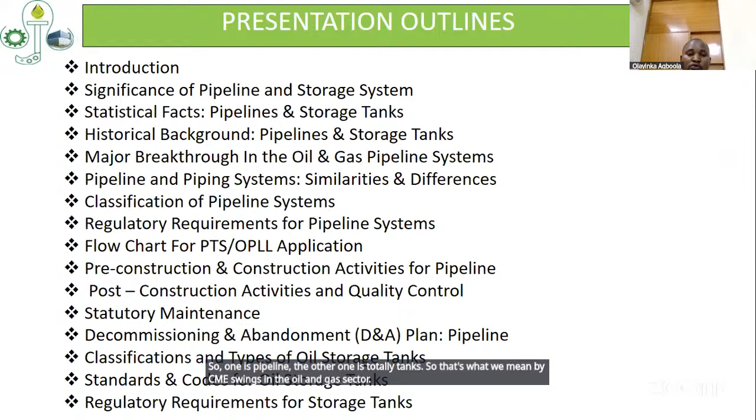And if you go back, as you can see from this picture, we can see these twins joined together by their shoulders. One is pipeline, the other is storage tanks. That's what we mean by Siamese twins in the oil and gas sector, because whenever you talk about pipeline, we also talk about storage.

Now the importance of pipeline and storage cannot be overemphasized because it cuts across the upstream sector, which has to do with exploration, development, and production, and also the midstream sector, down to the downstream sector. In all three sectors of oil and gas, upstream, midstream, and downstream, you must talk about pipeline and storage. That is why the importance of pipeline and storage systems cannot be overemphasized.

As important as these two things are, we must try as much as possible to design them with the relevant standards so as to function safely and effectively. Those are the two keywords. Whenever pipeline and storage systems are designed, they must function effectively, doing the work they are meant for, and work safely so that there will not be any form of explosion, leakages, and the likes.

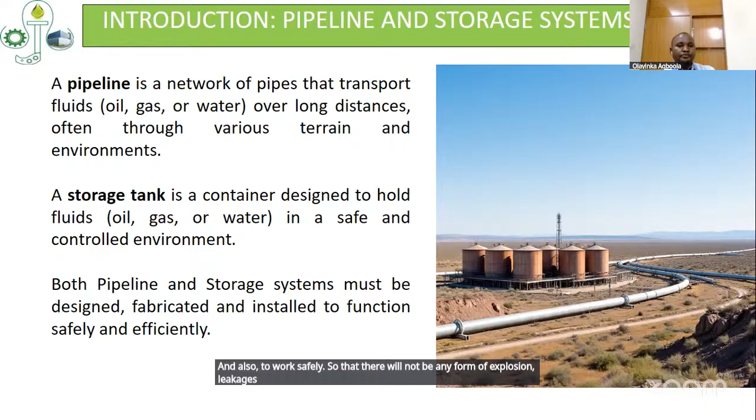Still talking about the significance of pipelines and storage tanks, let's look at a pipeline like the circulatory system of the human body. Those of us that did biology in secondary school know something about the circulatory system, and we want to relate it to the oil and gas sector. One thing I appreciate most in engineering and science is that everything scientists are trying to invent is like a creative ability that God has deposited in us. Everything we invent mimics the creative nature of our maker, which is God.

So now, in the oil and gas sector, let's look at this circulatory system. I said pipeline and storage tanks can be likened to our own circulatory system. For pipeline and storage, you need a pump, either to pump into the tank or to pump away, either for discharge or to receive. The same way our heart is pumping blood, which in oil and gas can be oil or water, so is the pump working. So pump is analogous to human heart.

Then the pipeline is also equivalent to arteries and veins, which we call blood vessels, that take bloodstream from one region or organ to the other. Then the storage tanks in this sense are also equivalent to various organs. You pump blood to make the blood complete the circulatory system that we have in the human system.

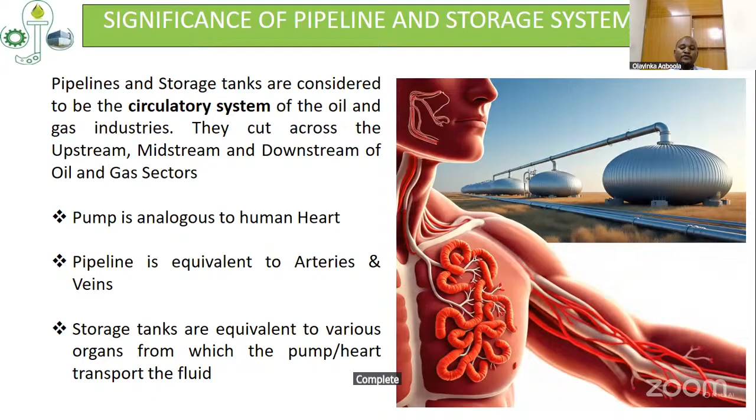Okay, so we are looking at the statistical facts about pipeline and storage. According to NUPRC, the Nigeria Upstream Petroleum Regulatory Commission, obtained from their website, there are 323 developed fields in Nigeria, that is in upstream. And then these fields are connected to 265 processing facilities. And then the stabilized oil and gas are exported via 31 export terminals.

So export terminals have to be connected maybe to a pipeline, or some people use barges to do the operation. Then the onshore processing infrastructure are linked to 8 crude oil or condensate NGL export terminals. So altogether, the total in Nigeria is about 5,284 kilometers of pipeline. Also, as at Q1 2023, what we have is about 3,200 kilometers of gas pipeline in Nigeria. And then the current one everybody should be aware of is the 40-inch by 614 kilometer AKK pipeline, which is the Ajaokuta Kaduna Kano pipeline.

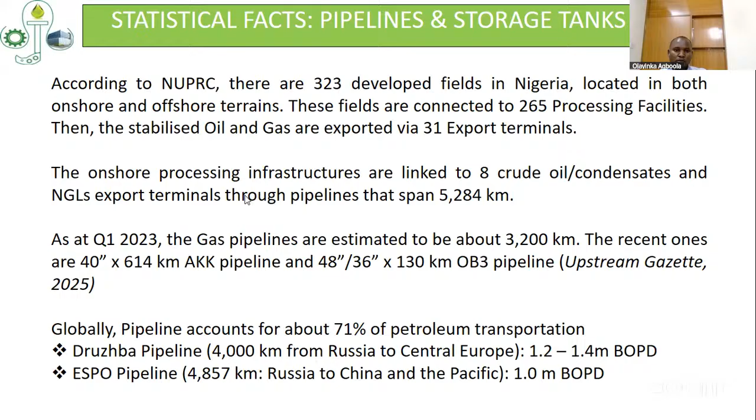Okay, so quickly, this third one, Nord Stream 1 and 2, is also from Russia, and the length is 1,224 kilometers. But this one, because of the ongoing issue, Nord Stream 1 and 2 is not operational at the moment. Then the Keystone pipeline system, which is about 3,380 kilometers, carries oil, 590,000 barrels of oil per day, from Canada to the US.

Now, as we have seen pipelines across the globe, in all this, the US has the highest span of pipeline than any other country. For gas alone, they have 1.9 million kilometers, and for oil, to receive petroleum products, is ranging around 240,711 kilometers.

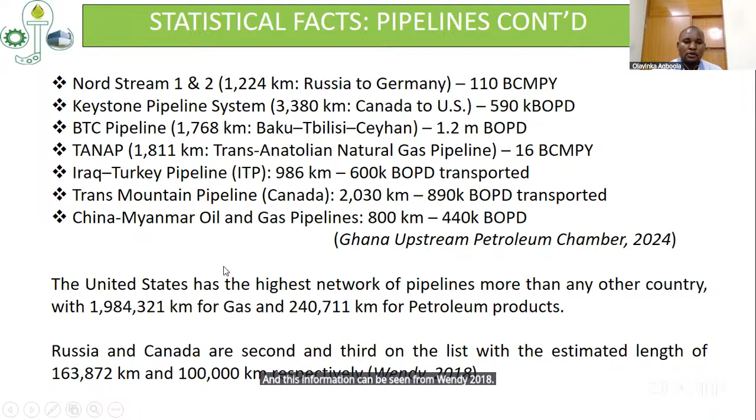Okay, so I move on. We are trying to lay this foundation so that we can understand the importance of pipeline and storage before we go into details.

Then a major breakthrough in oil and gas, the notable ones from the historical background: we have the Trans-Arabian pipeline, which we call Tapline. The length is a 1,930 kilometer pipeline, which was completed in 1950. So that is when the pipeline issue started coming up. Then they moved.

With the emergence of technology, the Alaska pipeline was also completed in 1977, to transport oil from Alaska's North Slope to Valdez, Alaska. These days, we see different kinds of pipelines cutting across different parts of the world. There's even one the Nigerian government is planning that will go all the way from Nigeria down to Morocco. That shows the importance of transporting petroleum products through pipelines.

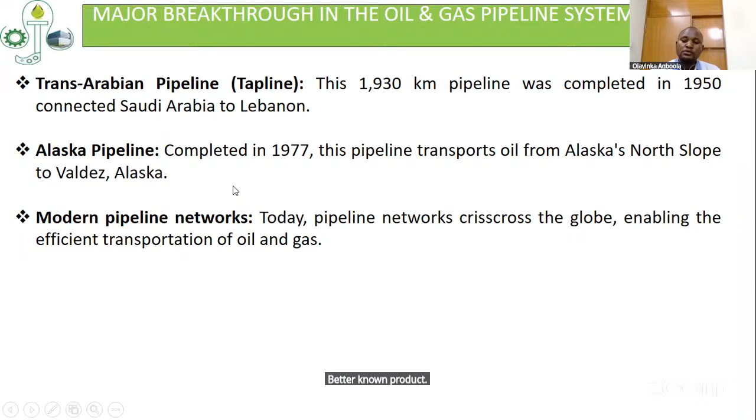Now, to some of our listeners who may not be in this field, or our young graduates, this might be confusing, because I also had that issue when I was an undergraduate. I didn't really know the difference between a piping system and a pipeline system. Once I saw a network of pipes, what came to mind was either piping or pipeline. I didn't really know the difference until later. So to cater for this set of people, we are trying to give the similarities as well as the differences between piping and pipeline systems.

So whether it's a piping or pipeline system, one thing is common among them: they make use of pipes, which we call line pipes. Line pipes are joined together, so whether it is piping or pipeline system, pipe must be there. Then there will be presence of valves and fittings, and either way, they are used to transport fluid.

But the difference is the length of transportation. If it's within a short span, maybe within the battery limits, that is piping. As we can see from this second picture, here we have pipes connected together — this is a piping system, while the upper one is a pipeline system.

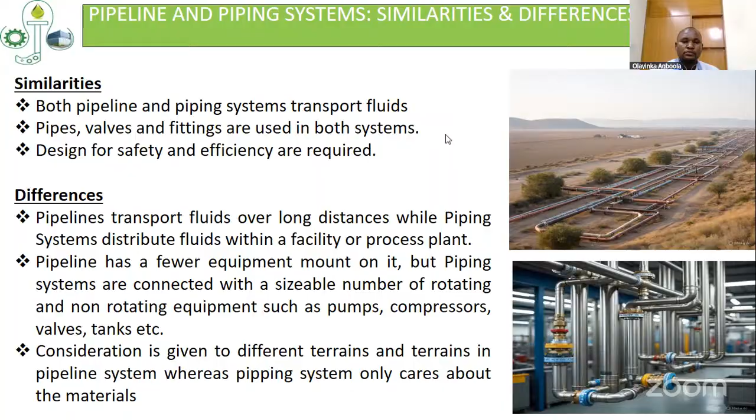Okay, so we move on to classification of pipelines. How do we classify pipelines? We use different criteria to classify pipeline. Based on location, we have onshore pipeline and offshore pipeline. Onshore pipeline is located on land, while offshore is underwater in the sea, just outside the land — it's called an offshore line.

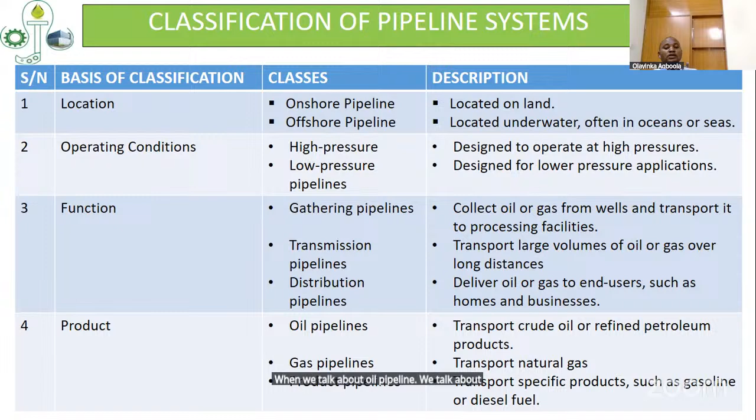If our classification is based on operating condition, then we look at high pressure pipeline and low pressure pipeline. If we look at the function we are using it for, we can classify them into gathering pipelines, transmission pipelines, and distribution pipelines. Lastly, if the classification is based on products, then we talk about oil pipeline and gas pipeline as product pipelines.

Okay, so now we have talked about pipelines. Pipeline is not something simple, because oil and gas is one of the most highly regulated industries all over the world, even in Nigeria. So a company cannot just wake up, or an individual cannot just wake up and say, I want to lay a pipeline from point A to point B, or lay an export pipeline from one location to the export terminal. No, it is not done that way.

The pipeline is regulated — speaking about Nigeria now, if it is an upstream pipeline, it will come under NUPRC, the Nigeria Upstream Petroleum Regulatory Commission. If it is a downstream pipeline, that will come under the Nigeria Midstream and Downstream Regulatory Authority. Another agency I omitted by mistake is the Federal Ministry of Environment — they are also involved, because anything you do that impacts the environment, the Ministry of Environment has to be carried along. So before a pipeline is laid, there are regulatory requirements that must be met.

So I classified that into two: approval of permit relating to pipeline routes, and approval relating to construction — those are the things you need regarding the pipeline route and the construction.

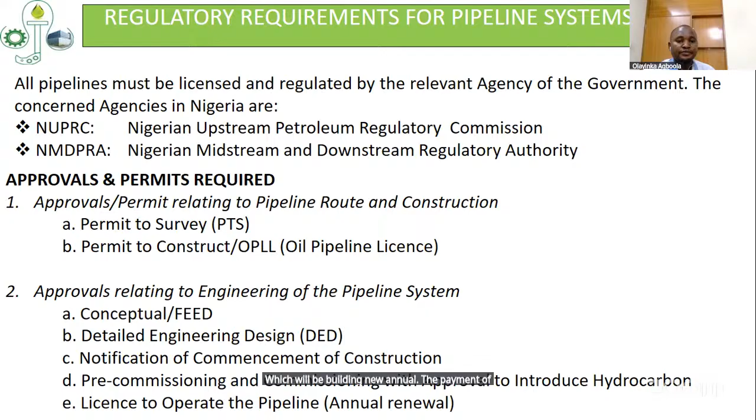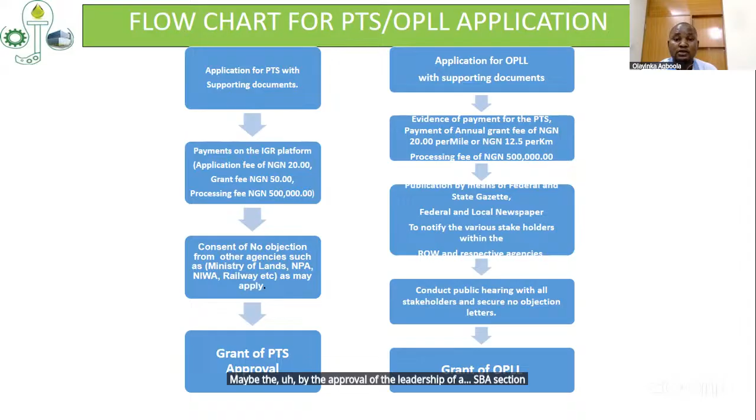This flow chart shows the process for getting the permit to survey. The left one shows the flow chart for the PTS, while the one on the right shows the flow chart for obtaining oil pipeline license. Because of our time, I may not be able to go into details, but with the approval of the leadership of SPE Abuja section, maybe we can share the PPT slide.

In the design of the pipeline, there are some relevant standards and codes that must be followed. Number one is power piping, ASME B31.1, which is not relevant to this discussion. The second is ASME B31.3, process piping, which is for piping. The last two are ASME B31.4, pipeline transportation system for liquids and slurry—this one is relevant to our discussion today—and the last one, gas transmission and distribution piping system.

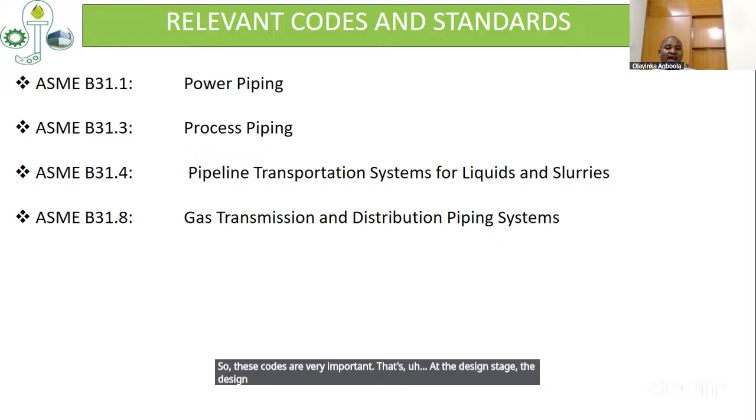These codes are very important; at the design stage, the designer must be familiar and design to ensure there is no failure. After the design stage, once we have succeeded in designing and our design has been approved by the relevant authority, the next thing is to go into pre-construction and construction activities. So we are dividing it into pre-construction activities, construction activities, and post-construction.

For the pre-construction activities, as I said earlier, route selection: you select the route that you want the pipeline to go through, taking into consideration the environmental and social effects. If you discover that the route will go through a museum, or through people's houses causing so much demolition, the pipeline might be rerouted to another node to avoid causing so much havoc. So route selection is very important.

Then the second is the permitting—as I said earlier, you get the necessary approvals before we go on to do the construction activities. The third, as part of the construction activities, is land acquisition. There's something we call right of way. For the route that the pipeline will go through, we have to acquire some right of way, which can be a minimum of 10 meters and as high as 50 meters, depending on the diameter of the pipeline and its importance. If it is a gas pipeline, you give more room for right of way than an oil pipeline.

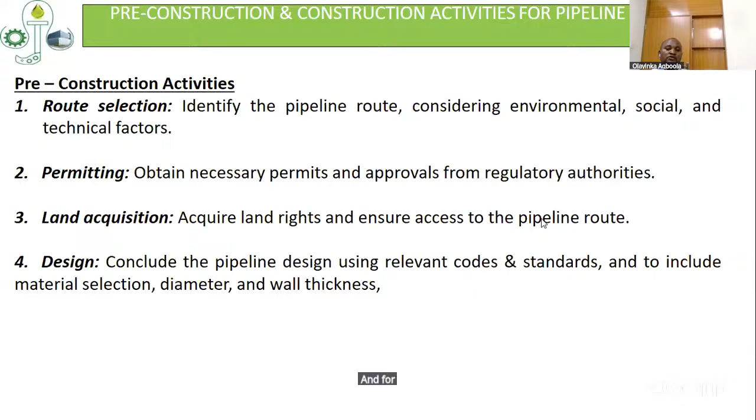Then the last one is design—the pipeline must be designed with the relevant codes and standards. The right material must be selected, then the appropriate wall thickness, which is the schedule number, must also be adhered to. For oil, the schedule can be 60 to 80, or schedule 40 to 60. For gas pipeline, it should be minimum schedule 80 and above.

For the construction activities, people already into pipeline construction will understand better. Number one on the list is clearing and grading—the parts along the route of the pipeline must be cleared and graded to remove any form of hindrances.

This is the clearing and grading. Then the trenching is to make the hole. This is the picture for trenching.

Next is stringing. Stringing of pipeline means just to arrange the pipeline along the trench. Then the welding, which is joining of the pipeline segments. Pipe can be 20 feet or it can be 40. Then the next step will be coating and wrapping of the welding joints.

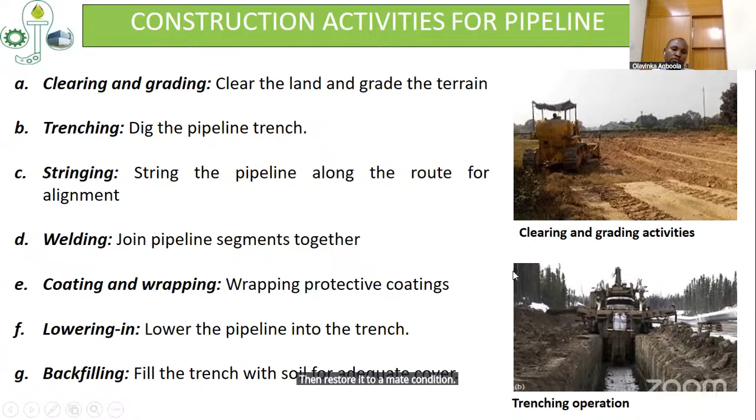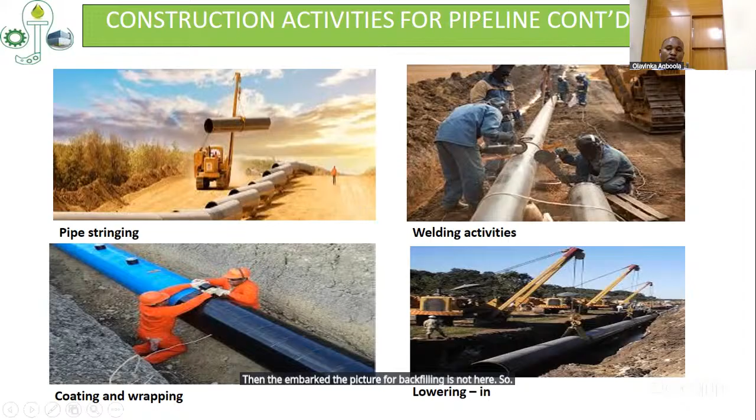So some of those steps I mentioned earlier: this is stringing, arranging the pipeline along the trench portion, and this is the welding going on here. This is the coating and wrapping of the pipe that has been welded. Then this is the lowering in, putting it into the trench. The picture for backfilling is not here. So this is the picture of the construction activities.

Okay, so after the construction, the last category is the post-construction activities and quality control.

Part of the hydro testing is to test the pipeline. Usually we use water for hydrostatic testing. If it is air, people call the actual name pressure testing, and it can be done with water or air. If done with water, which is the preferred one, it's hydrostatic testing. If done with air, we call it pneumatic testing. The purpose is to check the integrity of the pipe and the welding joints to see that they can withstand the pressure.

So usually the pressure test can be 1.25 multiplied by the allowable operating pressure, up to 1.5. Some people may use 1.1, some 1.25 multiplied by the maximum allowable operating pressure, and some use a maximum of 1.5. So for the gas pipeline, the allowable one is 1.5 to be multiplied by the MAOP.

Then the removal of air and water from the pipeline, which is known as purging. The purging of the pipeline is part of the post-construction activities. Then the final inspection of everything before the pipeline is put to use.

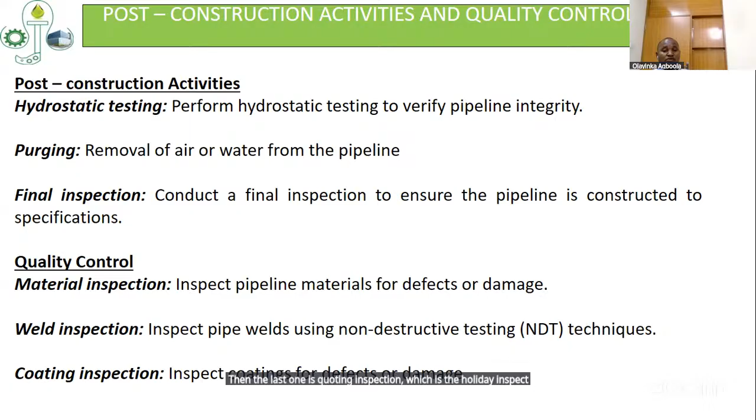Then the last one is coating inspection, which is the holiday inspection or holiday test, to inspect the coating for any leakage or any defects.

Okay, so now what are the statutory maintenance operations required on the pipeline? Apart from the inspection done by the facility owner, the company in this case, there are statutory maintenance requirements that regulators also look for, asking for evidence maybe on a yearly basis or once every 2 years. Number one is pipeline route surveillance. They always ask for this statutory maintenance.

How do you safeguard the pipeline right of way and conduct routine surveillance to ensure that the pipeline is safe and not causing any problem to the community where it's traversing, or where the pipeline is going through? For underwater pipelines, this ensures there's no leakage that can affect aquatic life.

Then another statutory maintenance operation expected by the regulator is corrosion monitoring, to see that there is no corrosion. As some people say, corrosion is corruption. As far as oil and gas is concerned, corrosion is corruption, and corruption of any kind is not allowed, so that there will not be failure of equipment.

So part of this is the cathodic protection system, which can be sacrificial anode or impressed current, whichever is suitable can be installed. That is for external corrosion from the soil to the outer section of the pipe.

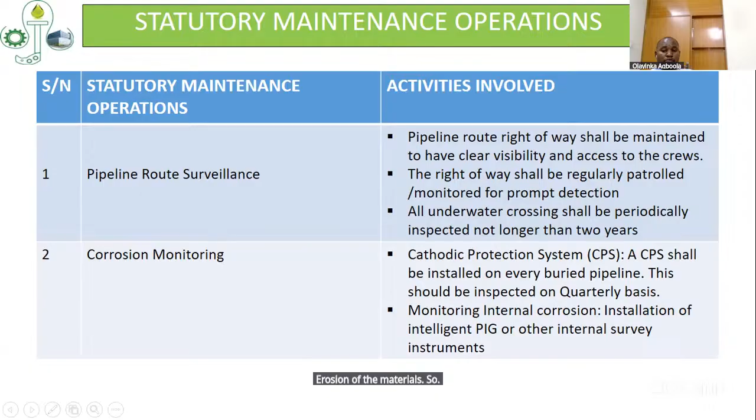Finally, on the pipeline, we look at decommissioning and abandonment. After designing the pipeline for maybe 20 to 25 years, or a maximum of 30 years - though it's actually supposed to be 20 years - after outliving its useful lifespan, you don't just leave the pipeline in the ground and assume everything is okay. It has to be decommissioned and abandoned in the proper way, and this topic is no longer taken lightly by the regulator.

Part of the decommissioning procedure is highlighted below. It's classified into different phases: project planning and mobilization, where you look at engineering review and risk assessment of the pipeline to be decommissioned. At this stage, you still need to get a permit and regulatory compliance for how you want to go about the decommissioning, then mobilize crew and equipment.

At the preparation stage, you look at shutting down the line and isolating it. Then the residual fluid in the pipeline must be removed, followed by flushing of the line, then disconnection and cutting - you cut some of the line, disconnect it, and remove it from the soil.

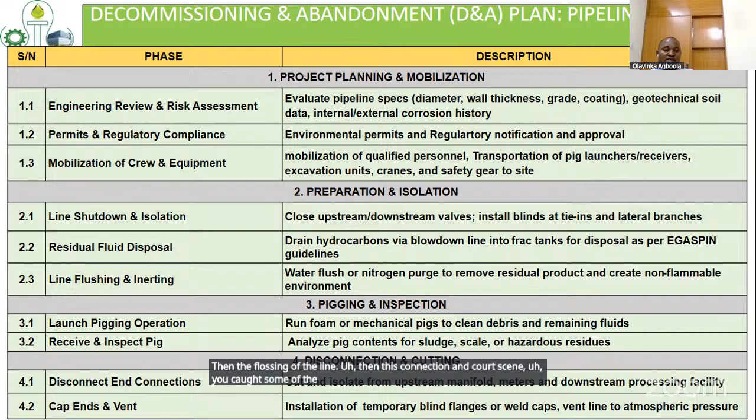After removing them, there's excavation of the buried section, lifting and staging pipe segments, transport to the disposal yard, then abandonment in place where applicable. The next step is to backfill and grade the line to restore it, then erosion control and vegetation. The purpose of all this is to keep the motherland in a proper place so our activities don't negatively impact the environment.

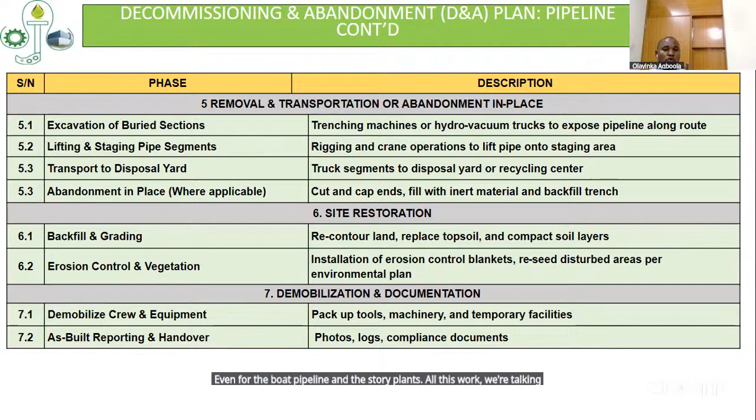That is why proper decommissioning and abandonment must be put in place, both for pipelines and storage tanks. All this while I've been talking mainly about pipelines, so now I move on to storage tanks.

Because of my time, I will try as much as possible to move quickly. Classification of storage tanks: we use different criteria to classify them.

Looking at classification based on shape, we have cylindrical tanks, spherical tanks, and cuboidal tanks. This is an example of a cylindrical tank - you can see it is cylindrical in nature. In the next page you'll see spherical tanks. These two types, cylindrical and spherical, are used in oil and gas. Cylindrical tanks can be used for oil, water, and the like, while spherical tanks are used for storing gases, specifically gas and NGL (natural gas liquid). Cuboidal tanks are not applicable in oil and gas, but some people use them as overhead tanks for storing water. Based on shape, these are the three types we have.

Based on orientation, we have vertical tanks, as in this example, and horizontal tanks, when positioned by the side. On the next page we will see pictures of all this.

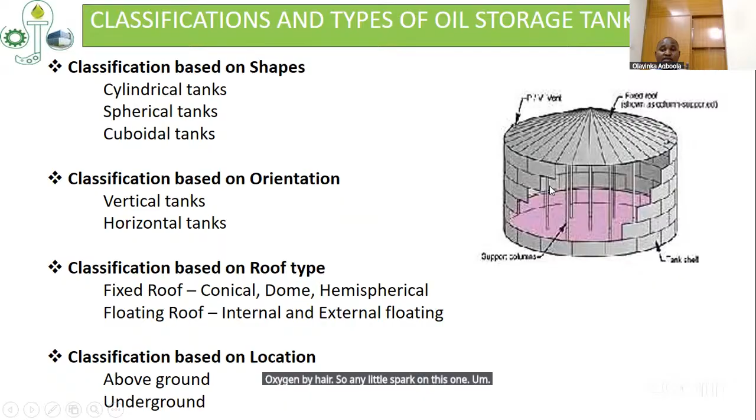Unlike this fixed roof tank, you can only fill it to the top, you can't fill it to reach the topmost of the roof. And the space between the last shell here and the roof will be occupied by oxygen, by air. So any little spark can ignite the fire, and then everywhere will be burnt off. But in this floating roof, there is no room for air, and there cannot be fire.

So that is why floating roof tanks are so much more desirable, but it's so expensive. That is why it's somehow restricted and limited to refineries.

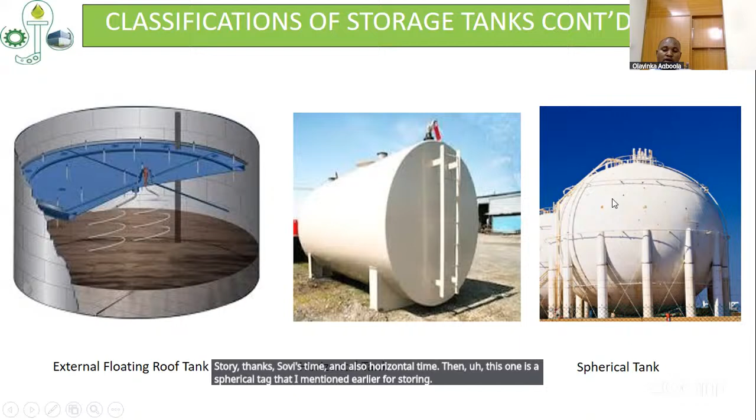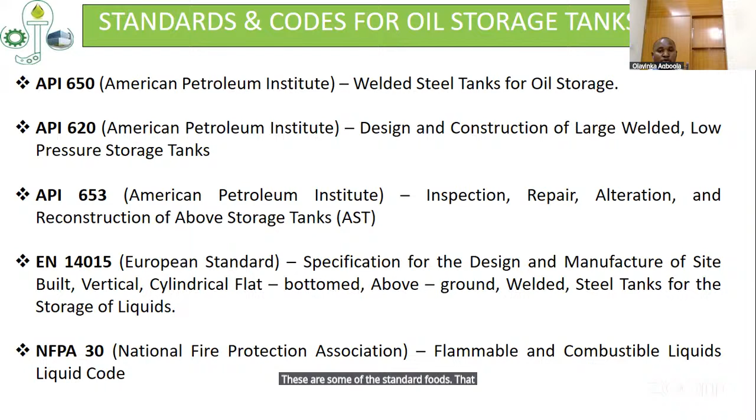Then we have API 653, inspection, repair, alteration, and reconstruction of above ground storage tanks. Then we have European standard EN 14015, specification for design and manufacture of site-built vertical cylindrical tanks. Lastly, we have NFPA, the National Fire Protection Association. These are some of the standards and codes used for designing oil storage tanks.

So just like pipelines, storage tanks also - you can't just wake up and say I'm building a storage tank. There are approval gates, approvals and permits that must be obtained before we go ahead to build a tank. Part of this is a conceptual FEED, detailed engineering design, then notification of commencement of construction, then commissioning with approval to introduce hydrocarbon.

Then also approval relating to inspection, testing, and calibration of storage tanks. After we build the tank, there must be approval that necessary non-destructive testing has been carried out to ascertain the integrity of the tank that has been built. The tank must be hydro tested.

You fill it up with water and check the settlement level. And also the tank must be calibrated to ensure that you have the volume at incremental height, at incremental volume, at incremental level. This is what is called static measurements, to know the content of the tank at every level.

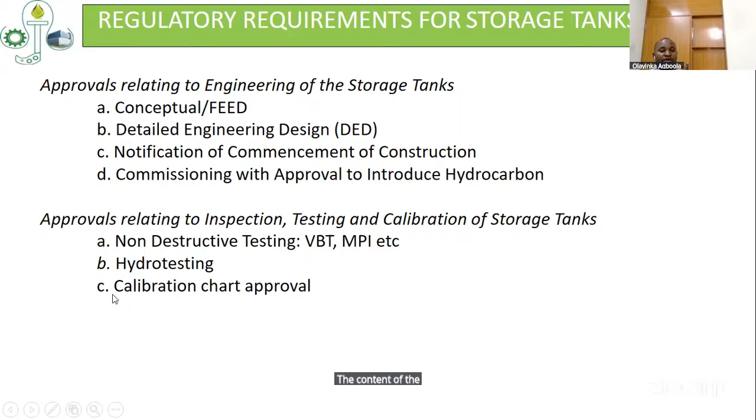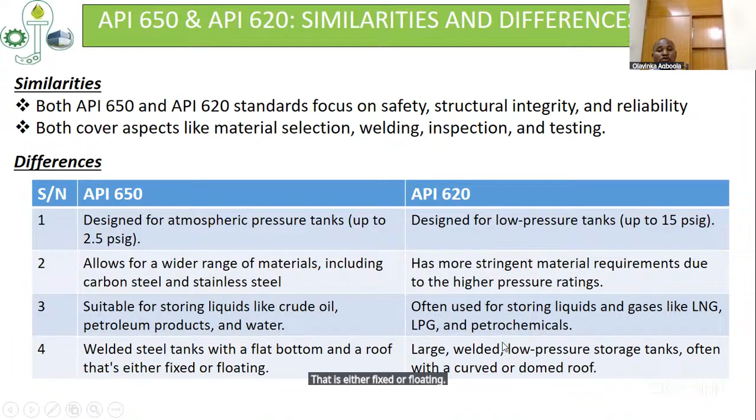Lastly, these are welded steel tanks with a flat bottom and roof that is either fixed or floating. But for API 620, it is always a dome roof.

So now, what is the importance of proper design? Strict adherence to the provisions of API 650, or API 620 depending on which is being used, must be observed to avoid disastrous failure. To ensure there is no room for any failure, everything stated in the API and other sound engineering judgments must be followed.

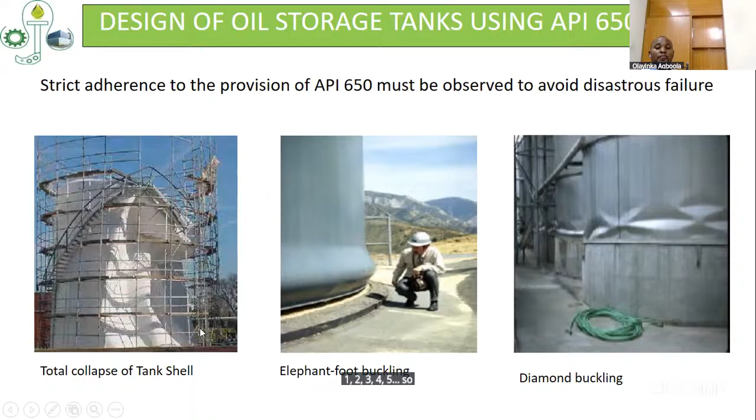So we have three methods. The common method is the 1-foot method - this one is so common and straightforward to use. The variable design point method is more stringent than the 1-foot method, but it's also more difficult to use. And the most difficult one is the elasticity method. But all three, if you follow them, will still give you satisfactory results.

Then you design for the roof, design for the bottom, and the nozzles and fittings also we design for them. And then in conjunction with a structural or civil engineer, the foundation is also designed.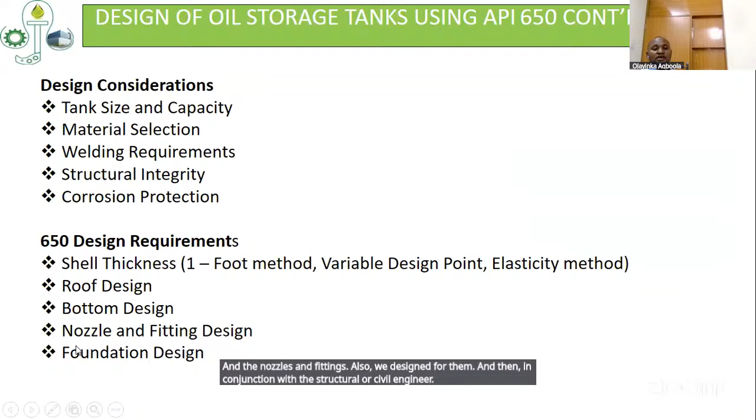Then what are the inspection and non-destructive testing carried out on storage tanks? While construction is going on, before the actual fabrication of the tanks, the welders are to be pre-qualified by competent welding inspectors, to ensure that the welders who will work on the tank understand the welding procedure they want to use, the material, and the likes.

Then when the proper construction has started, there will be radiographic or X-ray testing done on the selected joints. Then vacuum box testing on the welding seam to ensure they are not leaking. Then penetrant testing also must be done, and tightness testing. Some people also do post-weld heat treatment tests to ensure that all the induced stress as a result of welding is normalized.

Then lastly, hydro testing of the tank - fill it up. Hydro testing is done for two reasons: number one, to check the settlement of the tank base and the shell; number two, to see if there is leakage from the wall of the tank. So it will be so obvious that when there is a leakage, you'll be able to see it.

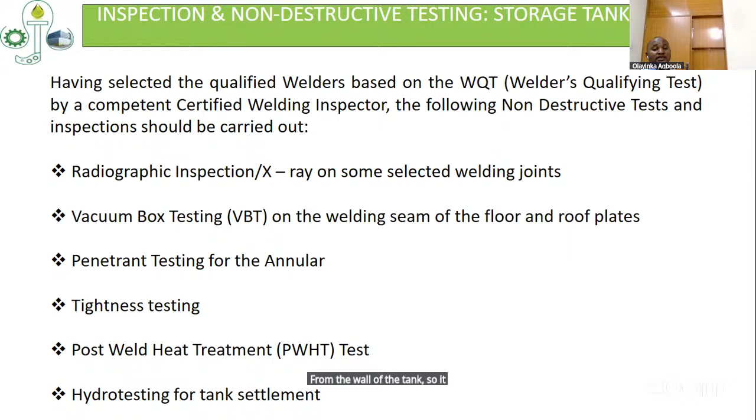Then the calibration, we are looking at the calibration and the commissioning of the storage tanks. As I said earlier, calibration is just the science of determining the exact true volume of a containment system at every level, incremental height. So every new tank must be hydro tested and calibrated. They must be hydro tested and calibrated before it is being put to use.

So as a result of calibration, a calibration chart or what we call a tank table will be generated, and that calibration chart is valid for 5 years. So you don't recalibrate until 5 years. The only condition that can make you do another calibration before 5 years is maybe if you have done anything on the tank, maybe change the bottom or change the product that is to be stored or change the shell. If you have done anything that will affect the structural integrity of the tank, the calibration must be done immediately. Don't wait for the next 5 years again.

So how is this calibration done? Calibration is done in two ways. We have a wet calibration method and then dry calibration method. Dry calibration method is otherwise known as the geometrical method, while the wet calibration is known as the liquid method. And the geometrical...

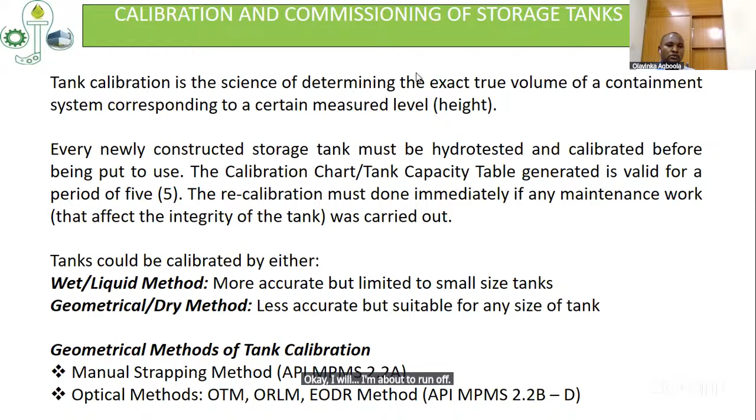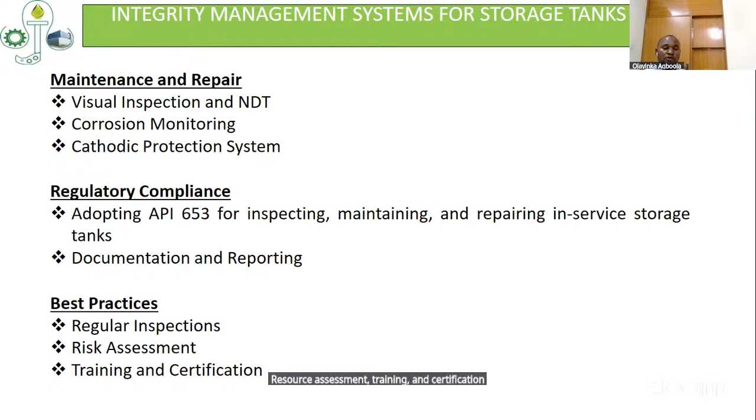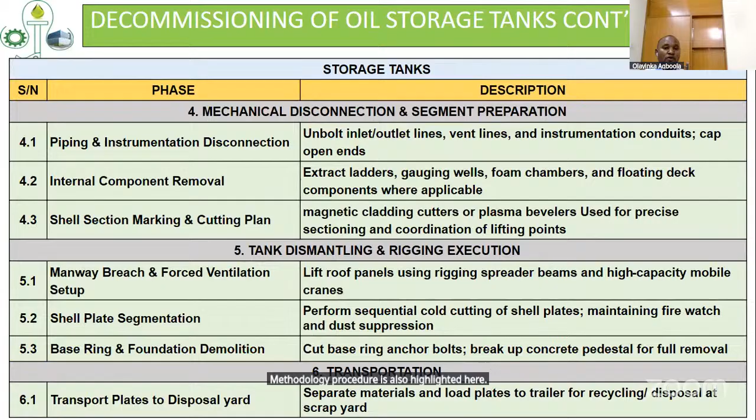Okay, so these are the integrity tests to be done on the tank, visual inspection, corrosion monitoring. Then the best practices: to do the regular inspection, risk assessment, training and certification of the personnel working on the tank. And for the decommissioning of oil storage tanks, the methodology, the procedure is also highlighted here for how to decommission and abandon storage tanks.

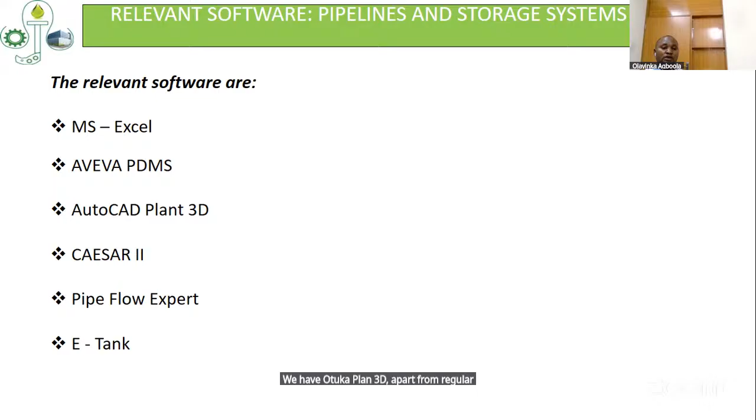Okay, so for the benefit of young engineers and maybe students and graduates alike, what are the software that can be used for pipeline and storage tanks? I put Excel as number one because I believe that Excel is the most versatile software, because once you understand the rudiments of the standard, you can quickly use Excel to do the programming by yourself. Then we have some other ready-made software like AVEVA PDMS for drawing. We have AutoCAD Plant 3D, apart from regular AutoCAD. We have CAESAR II, Pipe Flow Expert, and E-Tank.

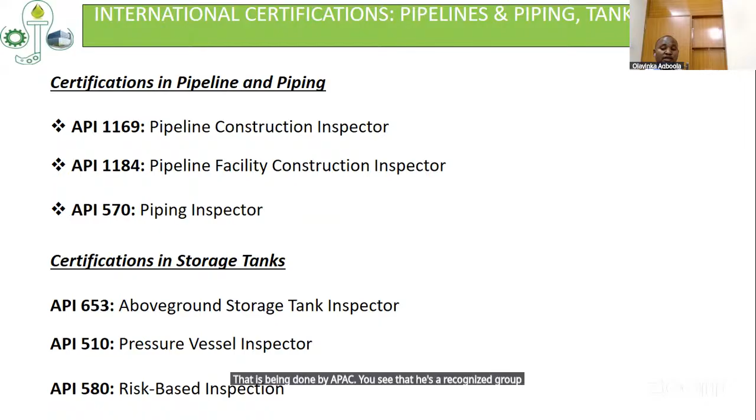Then what are the international certifications that can be obtained for pipeline and piping system and storage tanks? We have API 1169, which is Pipeline Construction Inspector. Then we have API 1184, pipeline facility construction inspector. Then for storage tanks, we have API 653, above ground storage tanks inspector, API 510, pressure vessel inspector. So these are the certification courses that are being done by API. It's recognized globally, so you can take it. I think it's only in Lagos that you can write the exam.

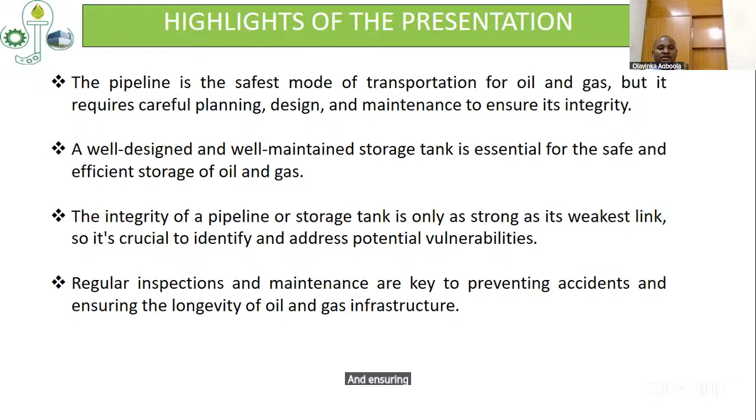Okay, so the highlight of the presentation as I'm rounding up is that the pipeline is the safest mode of transportation, as I said earlier, for oil and gas, but it requires careful planning, design, and maintenance to ensure its integrity. Number two, a well-designed and well-maintained storage tank is essential for the safe and efficient storage of oil and gas. The integrity of pipeline or storage tanks is only as strong as its weakest link. So it's crucial to identify and address potential vulnerability. Then regular inspection and maintenance are key to preventing accidents and ensuring the longevity of oil and gas infrastructure.